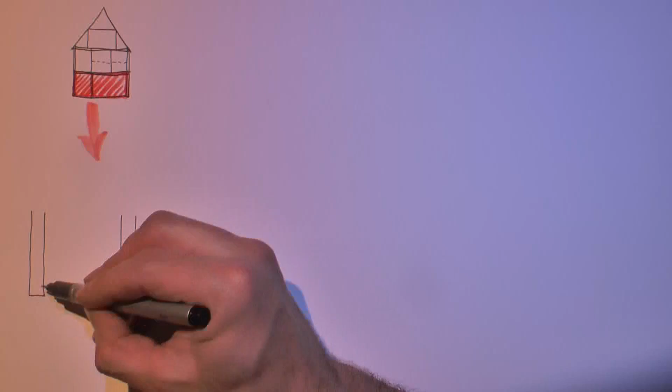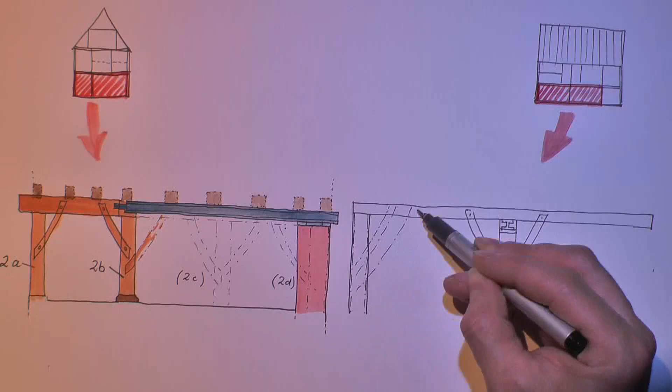The old half-timbered house that I am restoring is damaged in many parts of its construction. Some parts are in a really bad shape. In this video I will show you about a long inner wall or timber frame here on the right that is very important for the stability of the house.

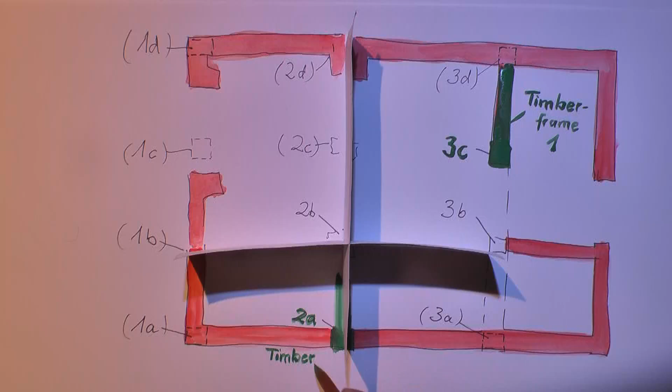To show you how these two perpendicular sections here go together, I have made this little model. The critical wall is going lengthwise from left to right. The posts once were in a regular pattern. I already showed the replacement of the posts 3C and 2A in previous videos. Now let's do post 3B.

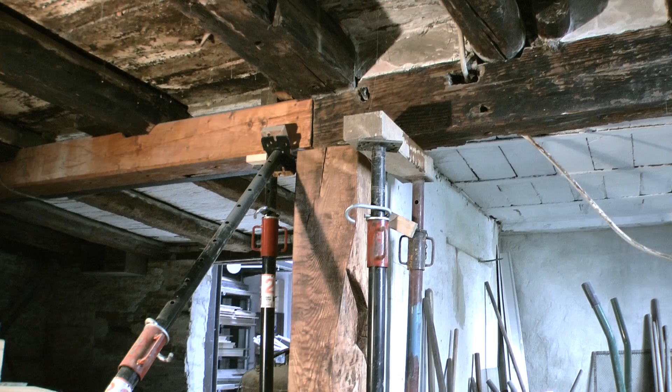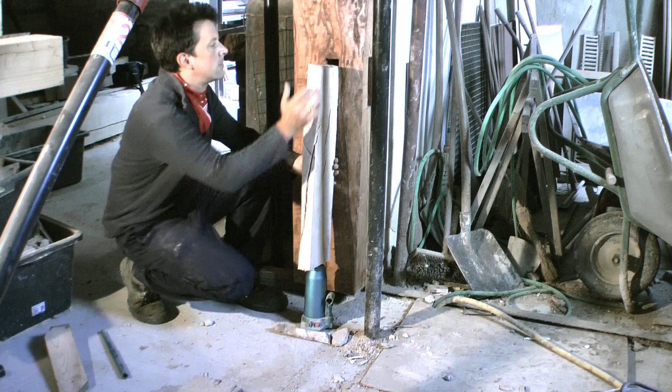I cut it from a very big log using my bandsaw mill and made the usual mortises sideways and a tenon on its top. This has to go inside the mortise in the top plate. So I pressed it upwards with a bottle jack and then put a sole plate underneath it.

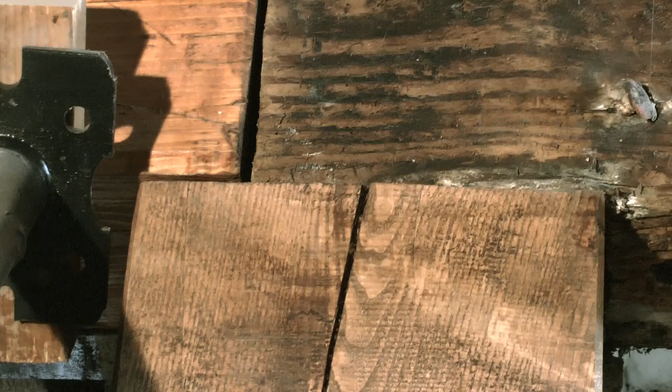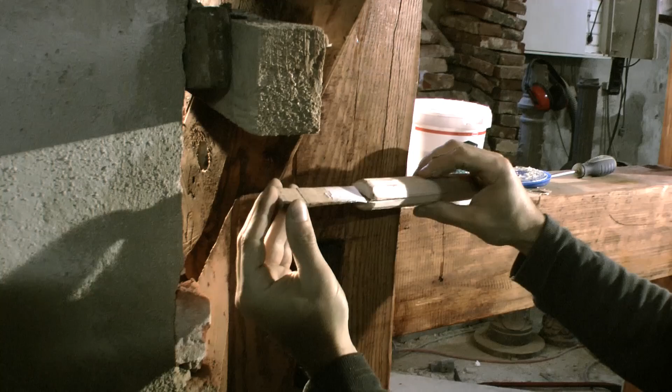The braces were inserted in the mortises and the holes for the wooden nails were drilled. But then I had a little problem. I couldn't get the dowels in from the right side. So I tried this from the other side and used some tricks with a self-tightening wedge that did very well.

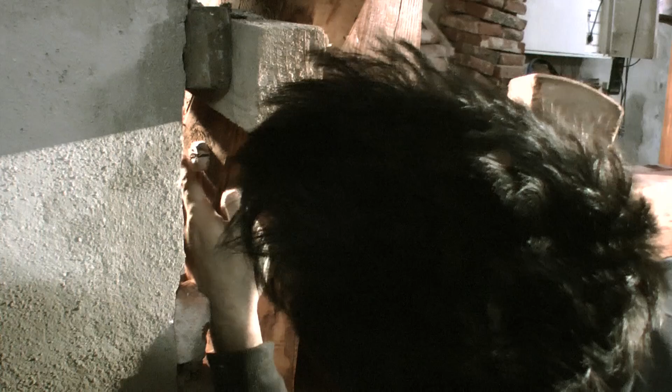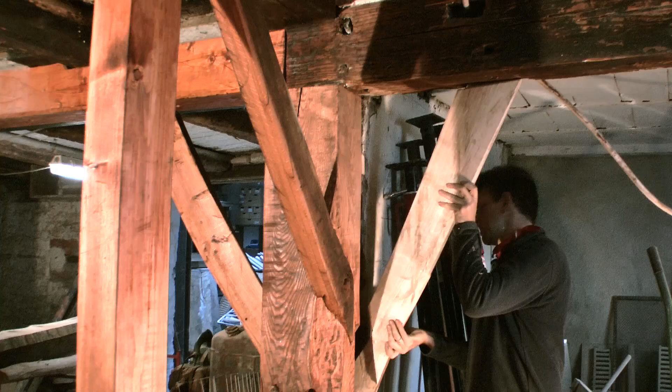To get the lap joints of the braces right, I transferred the mortises of the beams on a piece of paper and from that to the braces. That worked better than my first attempts with measuring distances and angles, but it still wasn't precise enough. I always had to make some adjustments to get the braces in.

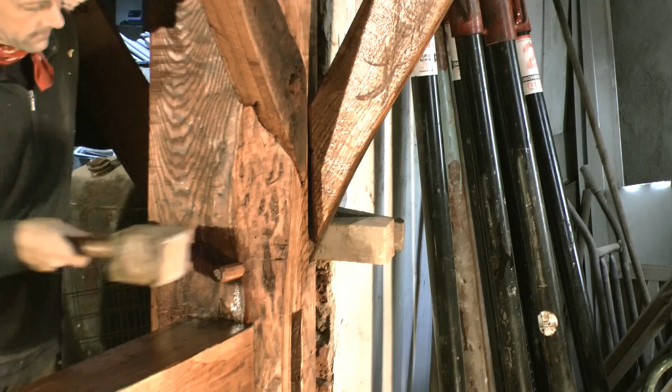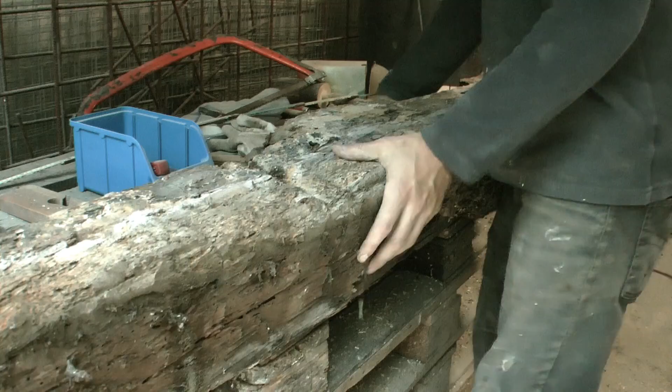Now to the post 2B, the worst post ever. For many years I have been looking at it and wondering how to repair it. Then finally I took it out and saw that there was nothing to repair, but only to replace entirely. I still don't know what held this house upright for so long.

Maybe the plaster. Fortunately, the old post showed clearly where the braces and the sill plates were joined in. There was even a rest of a brace in the joint, showing that the braces often were simply cut flush with the post when they were removed.

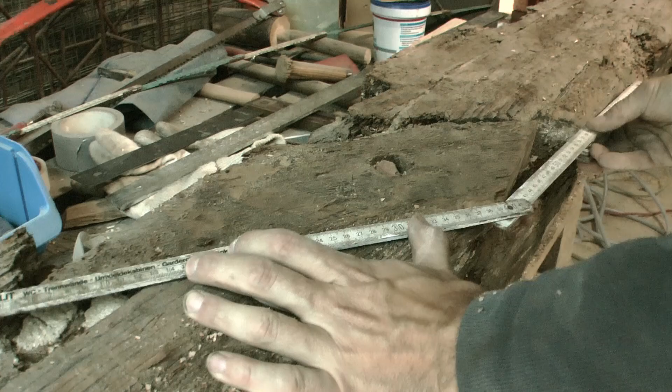Copying the mortises on a new post was easy, because it didn't need to be so accurate. It's the braces that have to be made accurately afterwards. For carving the mortises I used again my combined hand tools, power tools technique. Efficiency is important if you have to do not only one beam, but an entire building.

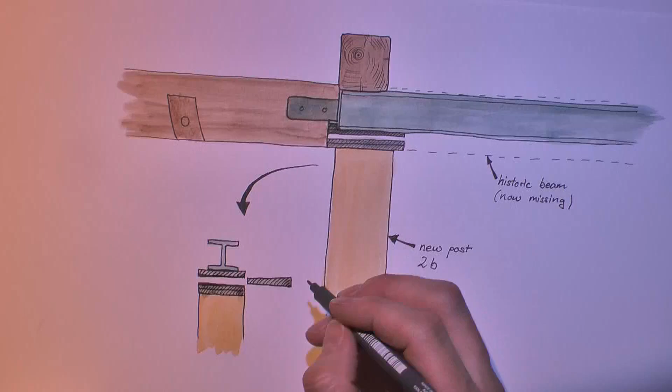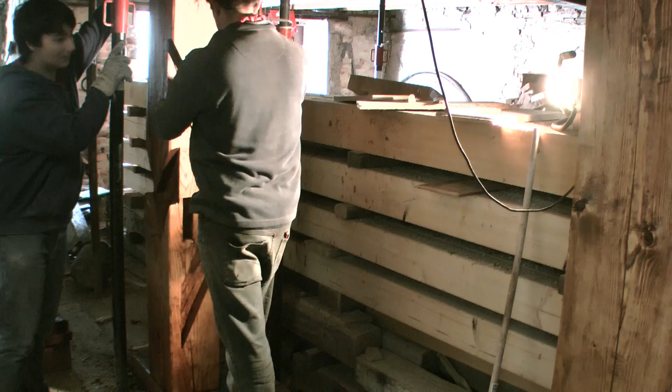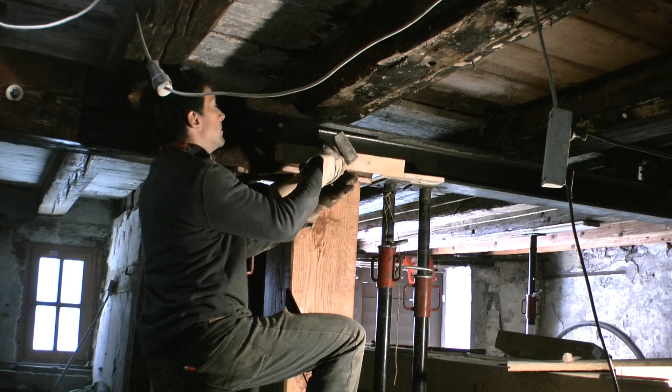Directly above post 2B, the wooden top plate ends and the newly inserted iron beam begins. Now I had to put the post under this beam and to wedge in some very slightly tapered plywood pieces. First, the post was set loosely on the sole plate and the sill plate was put in. Then the adventure began, hammering in the wedge so that the post supports the middle of the house properly again.

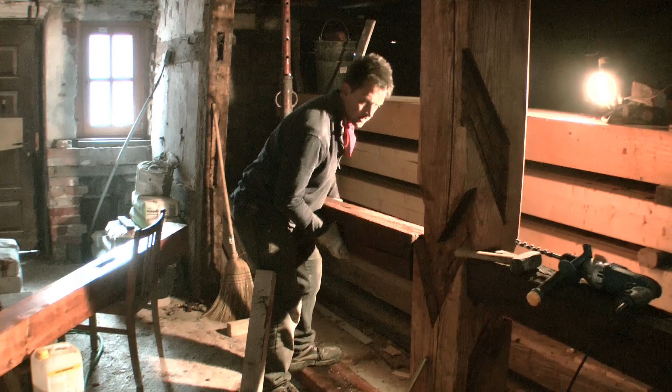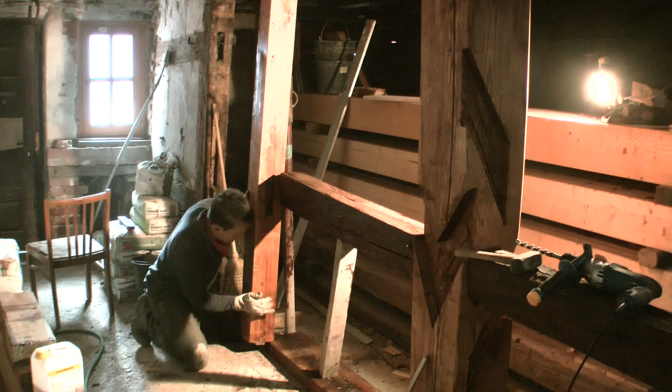Then I had to carry on with timber framing on the left side. The next post doesn't support anything but is only a door frame. All posts are fixed on the sole plate in the end using dowels at 45 degrees from the sides, but I didn't film that.

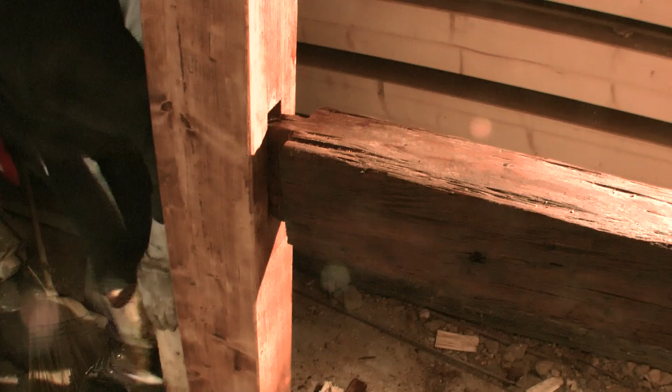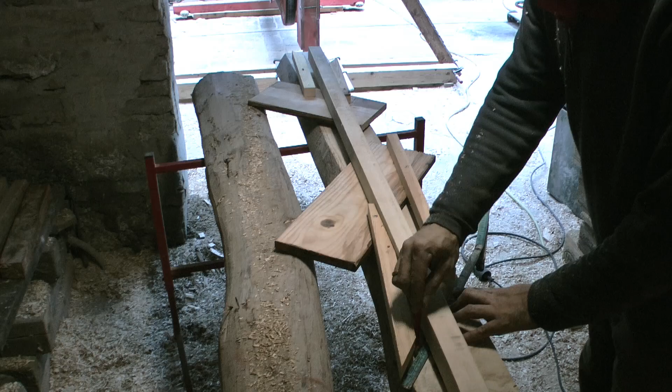As I already said, the methods of fitting in the braces needed some improvement. So I made this jig with 4 adjustable parts to follow the outlines of the mortises. The first advantage was that it was easy to search for the best position on the roughly pre-cut brace. The second advantage was that the brace fitted perfectly at once.

Post 2B once had braces in 4 directions, but I only made 3 because of the iron beam in the direction of the 4th.